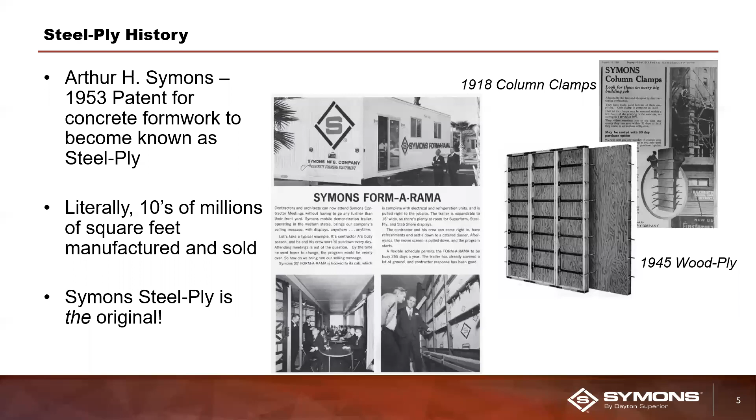So first, a quick look at some of the features and benefits of the system. I won't touch on all of these, just some key ones, because we'll touch on more of these as we go through the presentation. It is lightweight, about 5 pounds per square foot, so one person can easily grab one of these panels and set it in place. It's got a known pour rate for your crew, 1,000 pounds per square foot.

It's a modular form system, so I'll talk about that a little bit more. So versus a wood system where you've got measuring to do, drilling the tie holes and so forth, this does not have that. The hardware connections, the panel connections are easy and quick. Basically, someone with a hammer can go out there and put this system together.

It's a steel frame, and literally there are panels out there in the marketplace, I can tell you from history of being a competitor, that have been out there for decades. So the frame lasts a very long time. And also, with over 100 different standard sizes of panels, fillers, the rental fleet out there, it's very versatile, and contractors can adapt it to just about any project need that they have out there.

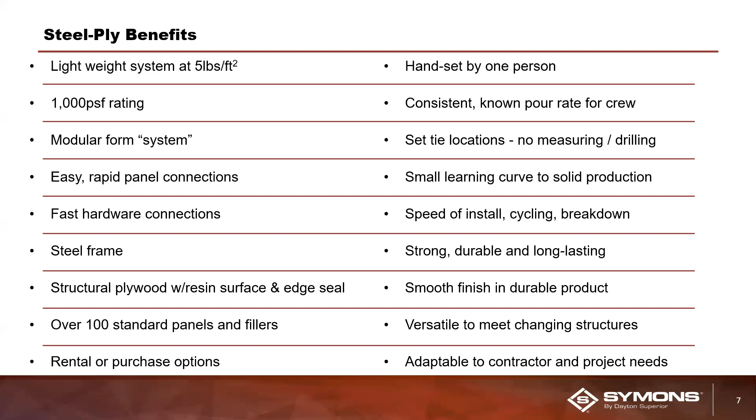Let's talk about some of the basics. I mentioned handset form system. So when we say handset, that's literally what it is. You know, one person can grab one of these panels, pick it up, set it into place, and then strip it the same way, right? And it's a system. So it's designed with accessories, smaller fillers, smaller panels, and products like the ties as well, that are used together as a form system.

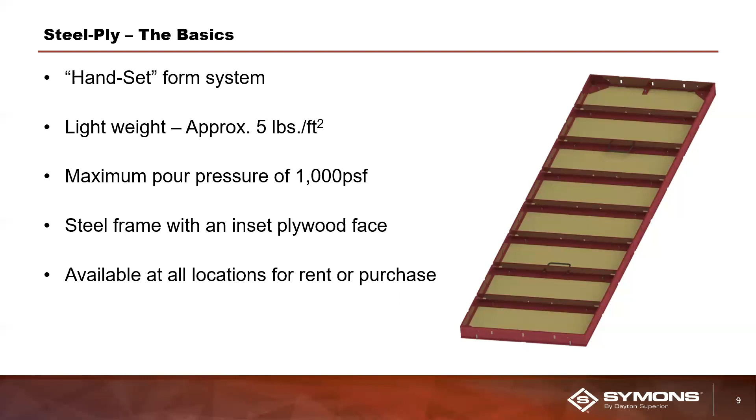A little bit deeper here. So like I mentioned, over 100 panels and fillers, right? So you've got panels and you got fillers. As we define that, a panel is anything at 24 inches wide. So that's your standard width of a form. So 24 by 8 foot, 6 foot, 5 foot, 4 foot, and so on. Anything under that 24 inches in width, we call a filler. So 4 inches up to 22 inches are all called fillers.

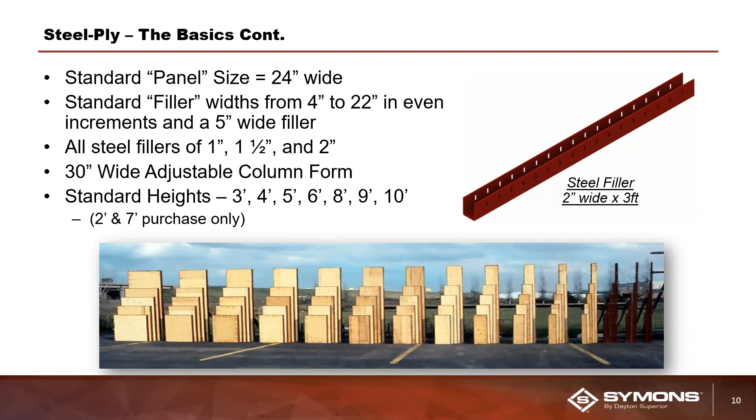All those fillers that are 4 inches and above get a wood face. And then we have all steel fillers, which are 1 inch, 1.5, and 2 inch. You can see over to the right, a 2 inch by 3 foot steel filler. It's a simple U-shaped piece of steel with the wedge bolt slots in the side there. We also have an adjustable column form, 30 inches wide. You can see down there in the picture, that's a very classic picture that we've shown over the years. You can kind of get a feel for the breadth of all the different panels and filler sizes. The 30 inches are clear in the left there.

So let's take a closer look at the form itself, some of the identification of the form. So the outside frame, the steel rail, as we call it, you have your 2 side rails. Those rails on the side tell you how tall the panel is, which we'll talk about in the next slide, how you determine how tall the panel is. And then the ones on the top and bottom, we call the end rails. Then horizontal across it, welded to either side rail, you have a cross member. And that cross member is what's called an equal leg angle. That means that steel angle is 2 inches by 2 inches. Both legs are of equal length.

You have a corner brace up there in all 4 corners. That corner brace is one of those changes that we've made over time with the system. It used to be just a strap in the corner. Now we have a more solid, rigid connection. Out in the field, that's where you see a lot of damage as these are dropped and moved around on the job site, in the corners. So that full corner brace helps support those corners.

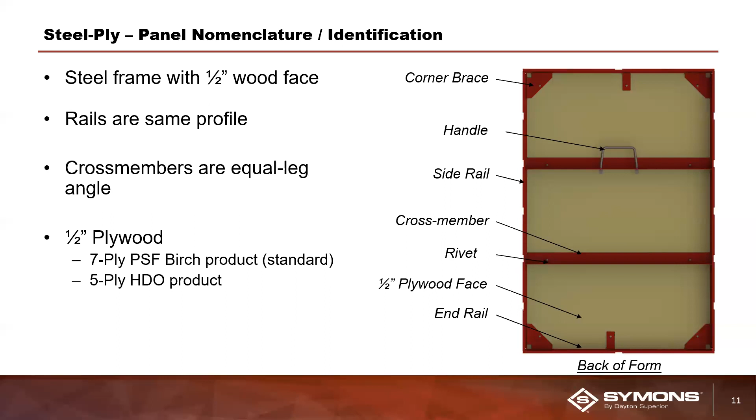So you can count it a couple different ways. You can count the number of cross members, add 1, and that's your height, or the number of spaces in between the cross members. So in this one, there are 1, 2, 3, 4, 5, 6, 7 cross members. Add one. This is an 8-foot tall form, okay?

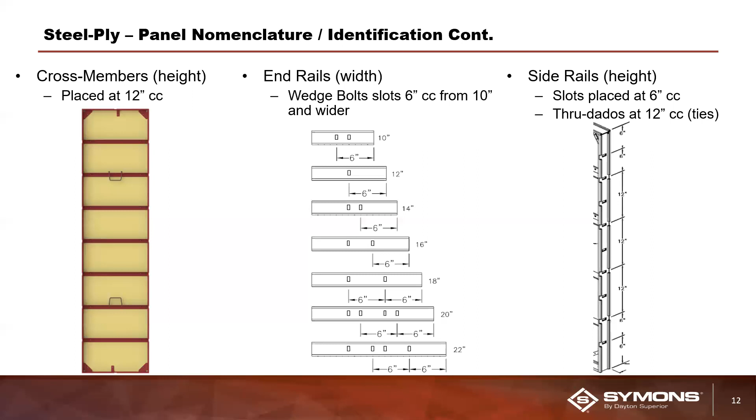It is also used in a lot of different accessory attachments. You'll see the scaffold bracket here in a moment and a few others. Where there's a tie location, the horizontal also goes through the tie and through the 2 rails, and that's what sets your wall width and attaches the tie to your 2 forms.

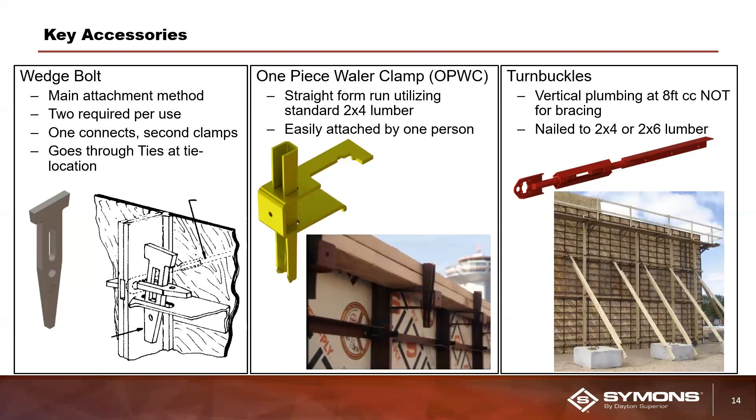Scaffold bracket. So this is important for safe access to the system itself, especially during pours. So the contractor will attach these to the form. You can see the scaffold bracket rendering to the left. These are OSHA tested and approved. The contractor provides the wood planking, the vertical posts, any rails that are required. Typically, we say 8 foot maximum on spacing. They do have a load rating, again, tested to OSHA standards. So depending on what's happening with the job, that may be a little tighter than 8 foot.

But these also use a wedge bolt horizontally through the rails. You can see in the drawing there in the ISO, horizontally a wedge bolt goes through, and then there's an S wedge that's attached to the scaffold bracket assembly that drives vertically down to attach it.

And the one on the right, obviously important as crews are working on the system, a safety eye. It is OSHA tested and approved for a tie-off location. It's easy to attach your safety belts to this product. It actually has a wedge bolt welded to it. That goes horizontally through two rails, and then a loose wedge bolt is driven down vertically.

And then finally, there's a nail that's driven into the plywood, so that kind of locks it in so it doesn't want to work its way out. It's important to note with this, when they're working on the system, that the wall is properly braced. Otherwise, you could have an issue there.

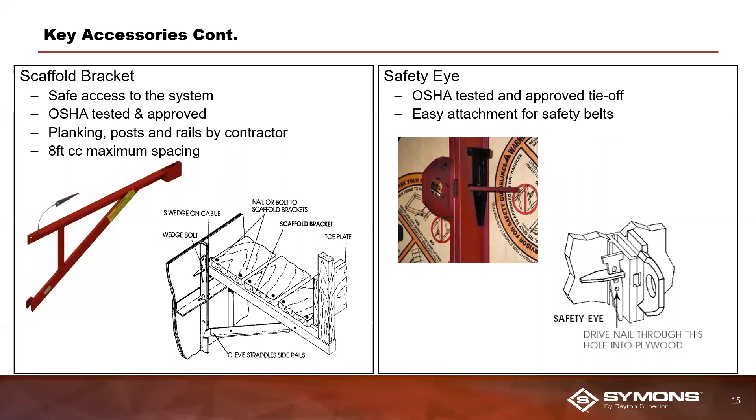Final one that I'm going to show as far as accessories is what I view as a really important one, an insert or a filler angle. We have these for just about every forming line that we have, and they really are a money saver, a time saver on a job site.

You want to use your modular forms as much as possible, but we all know there's cases where you have pipes penetrating or a lot of rebar, where you've got to either cut into your formwork, which is the more expensive route, or you've got to leave a space for that pipe or that rebar to come through. This filler angle attaches again with wedge bolts to your side rail, and then the contractor can put 3/4 inch plywood, screw it or nail it to the filler angle.

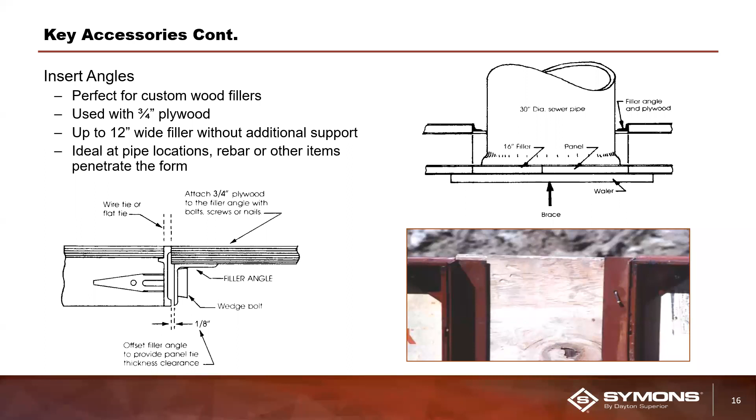Up to 12 inches without additional support, you can do wider, and then you're saving yourself sending back a damaged form. Now you've got a 3/4 inch piece of plywood, and the filler angle's rented. So in my mind, every time a job goes out, whether it's on a bill of material or not, some of these filler angles, insert angles should go out regardless. You never know. Something comes up on a job just about every time where you need something like this.

Okay, ties. So there's two main types of ties for steel ply: the S or round tie, you can see the top one there on the right, and the X flat tie. So obviously the S round tie is round and the X flat tie is flat. You can see the different capacities over there. The heavy duty X flat tie at 7,000 pounds ultimate, safe working load of 3,500. All ties use a 2-to-1 factor of safety, so we design it to that safe working load capacity of 3,500.

The S panel tie is a little under that. The heavy duty is about 6,000, or 3,000 safe working load. Both of them connect through the dados and the side rails, and they're both connected with wedge bolts again, that common connection piece of equipment. And the tie is what sets your wall thickness, and that's how they're ordered. So if you have a 12-inch wide wall, you order a 12-inch S panel tie or a 12-inch X flat tie.

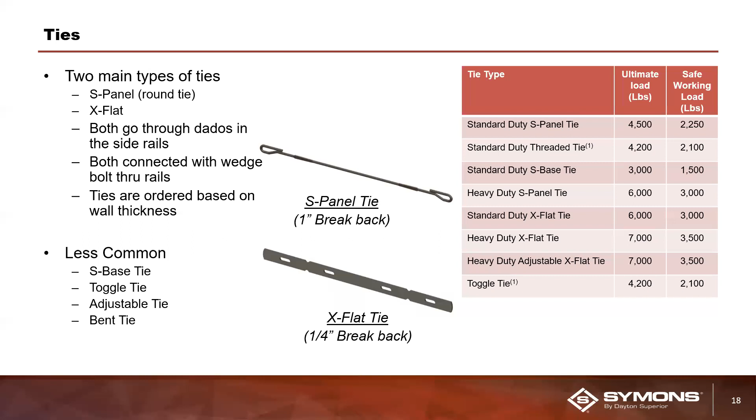A couple more quick things on the ties. One reason why you may want to use an S panel over an X flat: you can see that the S panel tie, how it goes through the dados and the side rail, gives you a little bit more flexibility up and down for rotation on that tie to hit the other side of your wall. The X flat tie goes all the way through the dados, front and back, and it's kind of locked in position, so it doesn't have that ability to flex.

One item I didn't mention on the previous slide, the X flat tie has what's called a 1/4 inch break back, and the S panel has a standard 1-inch break back. That break back is how far the tie breaks back from the face of the concrete when the tie is broken off. So the X flat tie is 1/4 inch back, the round tie is 1 inch back.

Another less common use, but it does come up, over there in the two renderings to the right, are bent ties. These are made to order based on what the job requires. So if you have a T intersection where you can't quite get your panels lined up or your ties lined up, or an odd corner situation like you see there, we can manufacture ties specific to that problem.

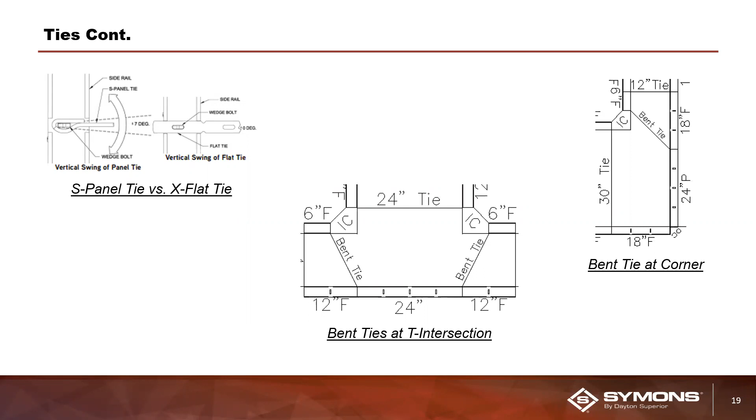So let's talk about some of the markets. Steel ply really is a product that I've seen used, and I'm sure that most of us have. It's used just about everywhere. It really is. It's very versatile. But here's some of the key areas that we see it being used in.

Residential, whether it's single or multi-residential walls. Subdivisions, if you go around subdivisions, a lot of times you'll see different formwork, but odds are you're going to see a Diamond S on the backside of a panel, a steel ply panel up in the air. It's always great to see.

Multi-residential, if you go down into, for example, Central South America, you'll see a full condo level done in steel ply. In some cases, they'll actually do the soffit or the roof of that condo at the same time in steel ply and support it with shoring and pour it all at the same time.

So multi- and single-use residential walls. On the right-hand side there, you see round or circular walls. We didn't really talk about it so far, but these can be used in a circular method. You know, grain bin foundations, radius retaining walls, other circular structures on treatment facilities, things like that. So we do use it quite often in radius applications.

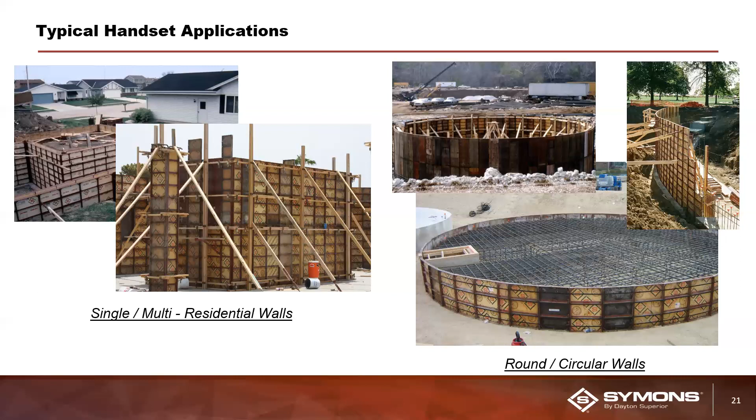Other applications, columns. This is a great form for columns, especially up to 24 inches wide. You've got all those different sizes of fillers and panels that you can use for your walls and do them tieless. We also have the adjustable I mentioned way at the beginning that does all the way up to 30 inches wide. So you've got great options for columns.

Taller walls. So again, we didn't talk about ganging or bigger walls in this. We focused on handset, but steel ply can be stacked, so you can do much taller walls, as you can see there. And then even a building sign. That one happens to be here at corporate in Miamisburg several years ago.

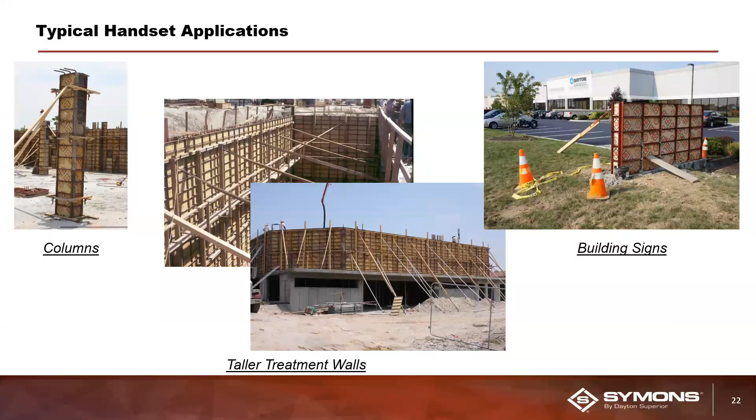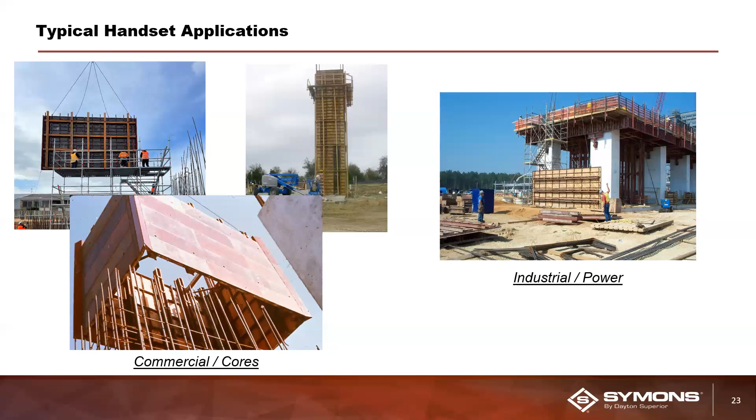Okay, so a lot of information there in those slides. There's a lot more for steel ply, and you can get all of this on the Dayton Superior website. You can get right to the steel ply homepage, and there's a brochure and a very detailed application guide there. Safety and ID sheets are there as well, and those come out with our application drawings if our engineering team is producing drawings for you. And the last thing, there's dozens of technical data sheets on some of the items I spoke about here, as well as many others. So a lot of information out there for you for steel ply.